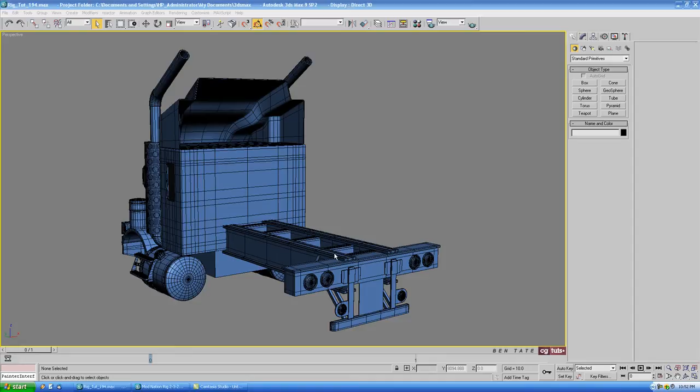Before we start working on the back of the truck here, let's actually get the mud flaps modeled in. They're going to go underneath and bolt right onto this beam here at the back. They're pretty simple, just like all the other pieces here, so we'll keep it as lightweight as possible.

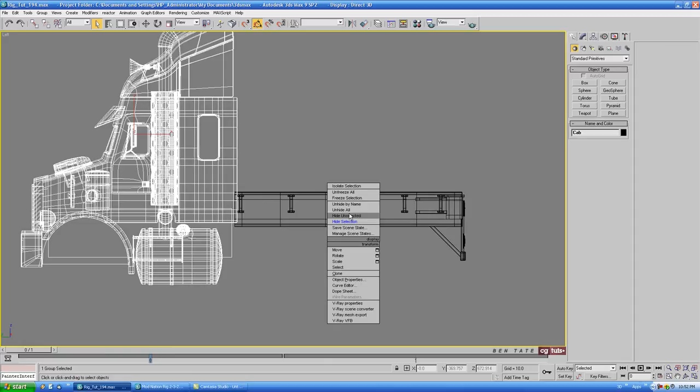Let's go into the left view and grab all the pieces here at the back. Just going to do Control I again. Before we do it, let's unhide all here so we have our blueprints, and then we'll hide the front of the truck. Let's zoom in here, and you can see it hanging down right here.

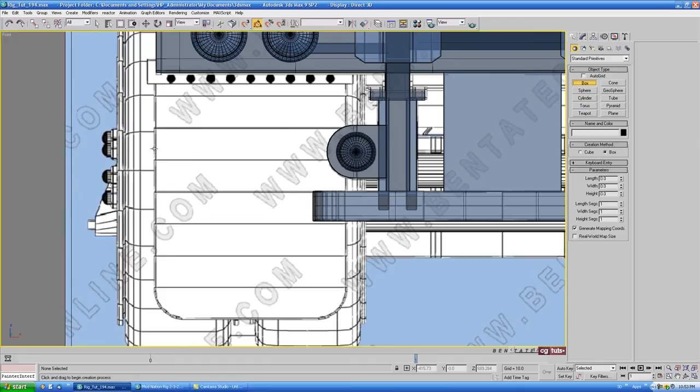Let's go back into the front view. I think we'll just start this out of a box, and then we'll put in the top bracket here as well as those bolts. Let's grab a box, and we'll draw it out from about here, and kind of fill the shape.

Give it a little bit of thickness, and we'll move it forward in the left view, and try to line up there. Let's put the blue shader on it, and we'll figure out if that's about the right thickness we need. That looks pretty good right there.

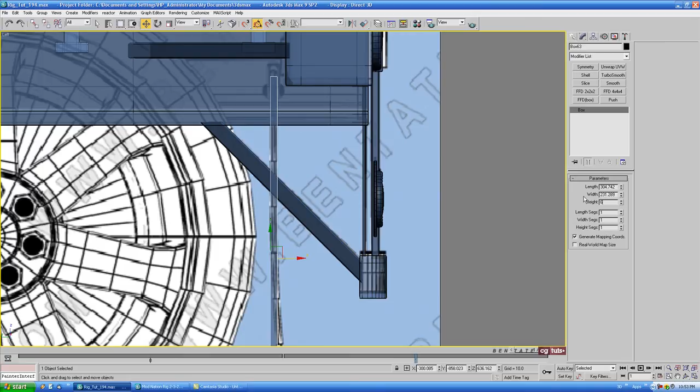Let's maybe do about 6 or so on the height. We'll convert to editable poly, and just move up the top verts here a little bit more.

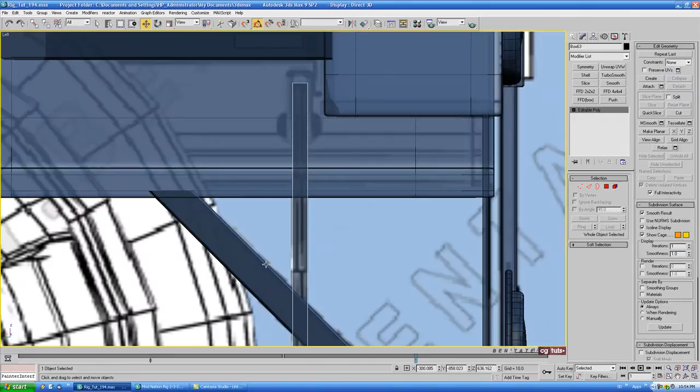Let's pull this up and try to line up with the blueprint there. It's a little hard to see, but it's right about there. We also need to bend it a little bit here at the bottom towards the back, so we're going to need to add some segments horizontally here on the surface.

So we'll go over to edge. Let's just grab the 4 side vertical edges and do a connect on that. We'll do maybe 7 or 8 segments here. Looks like 7 is what I had originally, so we'll go with that. No pinch, no slide. Hit OK to that.

We'll use the bend modifier just to bend out the bottom. Let's drop one of those on. If we do it right now, it's going to bend the entire object here, which isn't what we want. We want the bend to start about halfway.

So let's set this on the y-axis. We'll take the direction up to say 90, and bring up the amount a little bit here. You can see it bending out, and we don't want the top to bend.

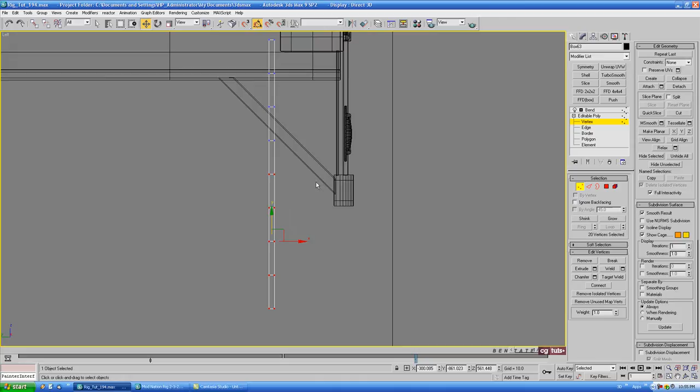So the way to get around that and only bend the bottom is to drop back down into the edit poly here, go into vertex, and grab maybe the bottom couple of rows here, verts, up to about this midpoint. Then while we're still in vertex sub-object mode, we'll go up and click on bend. You can see that only applied the bend from here down, and the top stays straight, which is what we want.

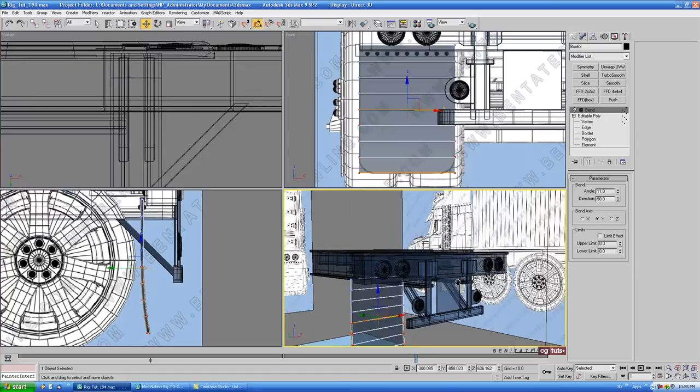Now we'll just adjust the angle down a bit until we match what's on the blueprints. Let's do about 11 or so, looks probably about right. So just like that. It still might be a little bit too thick. Let's maybe just leave it like that.

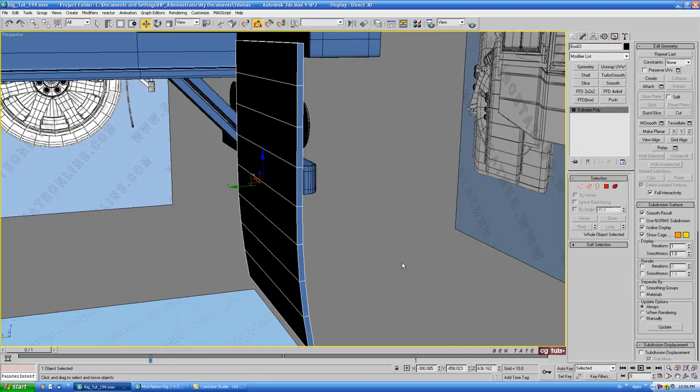Now I'm going to just collapse it to editable poly again to get rid of the bend modifier, and we'll chamfer down the edges a bit here. We'll start with the bottom 2 corners. Let's grab this corner edge here and the one on the other side.

Let's go back to the front view, and you can see they're pretty rounded over here, so we're going to give this a triple chamfer. With the 2 edges selected there, we'll open up chamfer. Let's take the amount up quite a bit.

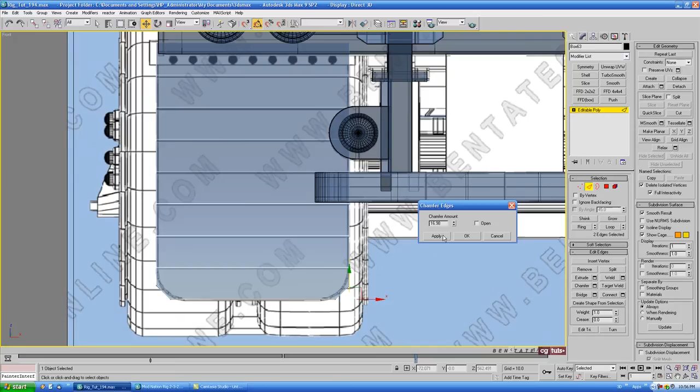Let's do about 17 or so on the first one, and we'll hit apply. We'll bring the second one down a bit. We can add some perspective so we can see where the edges are, and just try to evenly space those. Around 6.3 or so should be good, maybe just a little more, 6.5 or so. Apply one more time, bring this down a little more, and even out those edges. We'll hit OK, and now it gives us the round corners we need on the bottom.

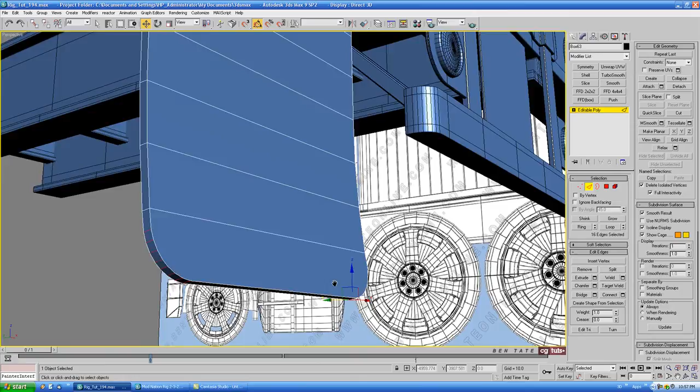Okay, so for the top, let me go into isolation mode so it's a little quicker to capture. We'll grab the 2 top corners and give them a slight chamfer. This is pretty much going to be hidden inside the bracket, so you're not really going to see this anyway. Let's do about 2 or so, and okay.

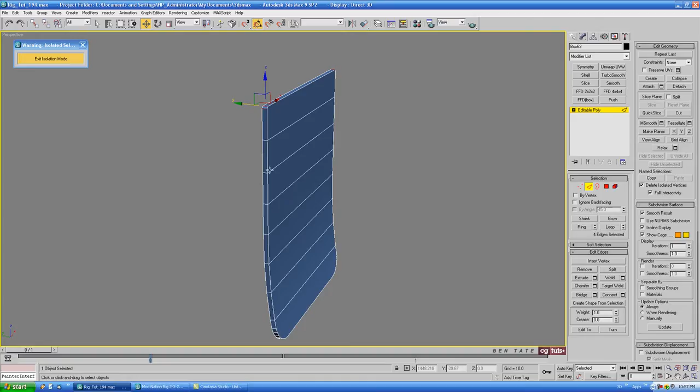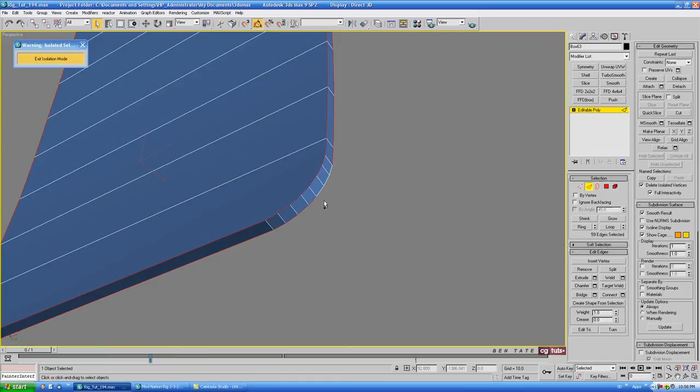We'll also chamfer down the outside edges here. Let's just grab the 4 vertical edges at the top, do a loop on that, and manually select these bottom ones. Hold down Control and grab these ones on the front and back, as well as the 2 longer bottom ones and the same ones on this side. Pretty much want to have the outline of both faces selected, the front and back faces. So like that, and we'll also get the top couple up here.

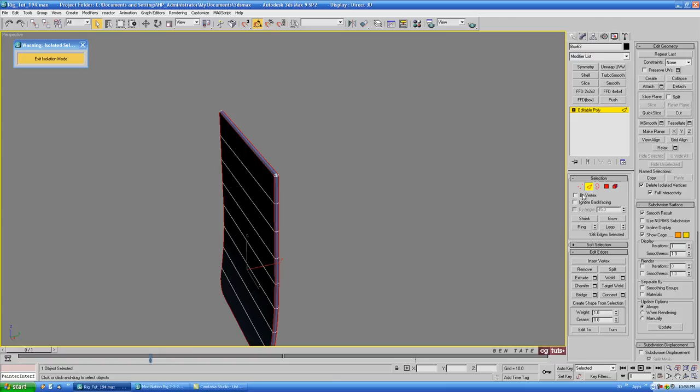We'll just chamfer these down a little bit, take that down a little more. Let's do about 1.5 or so, and okay. That's virtually it for the mud flap, really simple geometry. Now that we have that done, we'll just exit isolation mode.

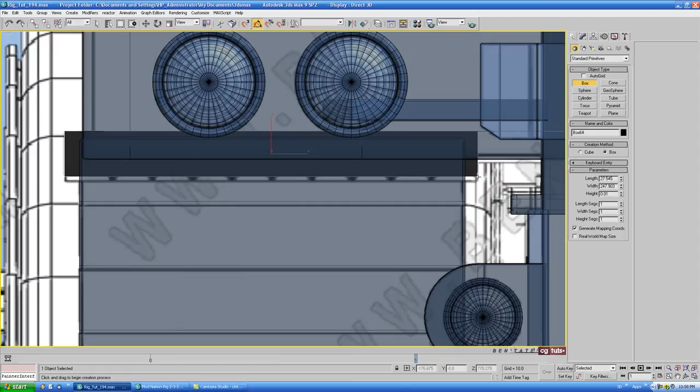We'll start working on the brackets here, back in the front view again. This is the bracket. We'll start this out of another box. I'm going to start in this upper left corner and take it all the way to the other side and try to line it up. Give it a little bit of thickness, and we'll move it to the back here in the left view.

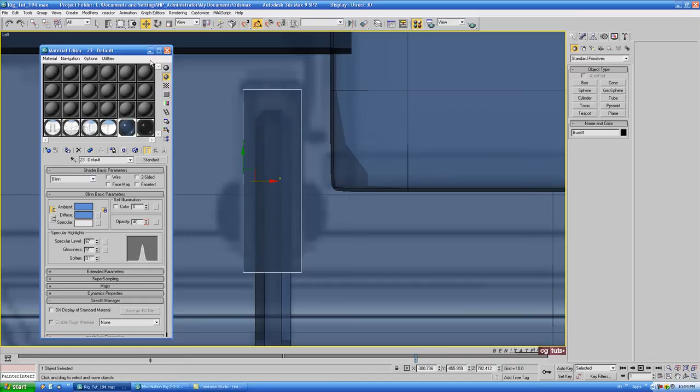We want to have the mud flap sandwiched in between kind of 2 pieces here, so we'll delete out some polygons in a second. Just see if that's about the right thickness we need. I'm going to put the blue shader on it, and that looks pretty close right there.

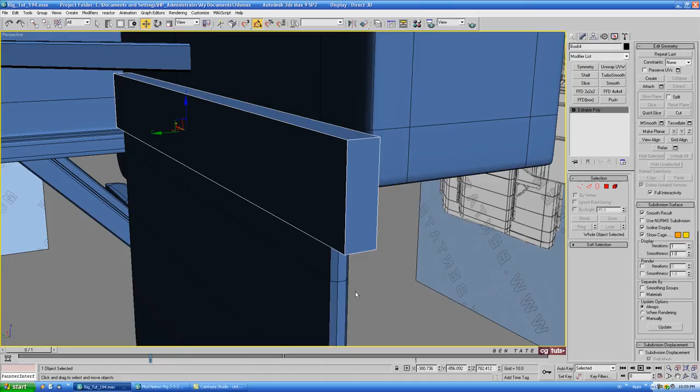Let's do maybe 10 or so on the height. We'll just kind of center that to the mud flap. Now we can convert this to editable poly. I'm going to select the mud flap as well as this piece, and hide everything else by going into isolation mode. We'll delete out some polygons here on the top piece. Back into polygon, grab the 2 end polys as well as the bottom one and delete those. Okay, just like that.

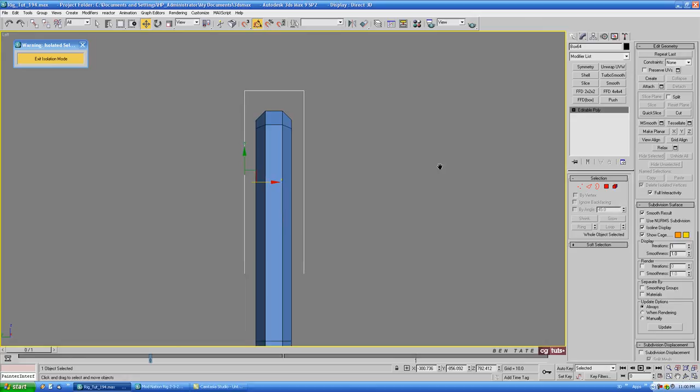We'll jump into the left view here, and to get some thickness on this piece we'll use another shell modifier. Drop one of those on, right click the outer amount and take up the inner amount. We also want to make sure we check on straighten corners so the edges are straight. We'll take that up until it touches up with the mud flap, and it looks like about 2 or so should be good. That'll give us a piece there that we can sandwich in between.

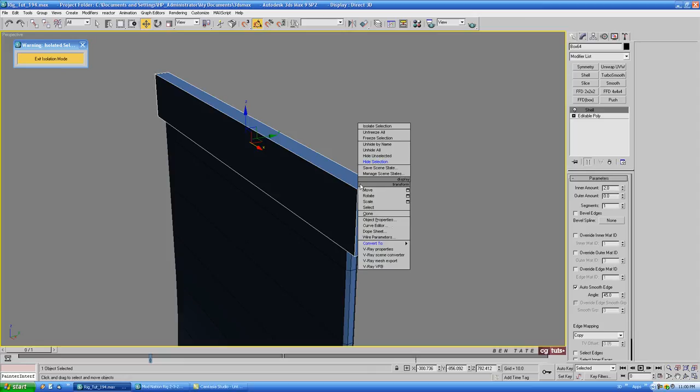That's pretty much it for modeling. We'll collapse it down to editable poly and knock off a couple of these edges. Let's grab these 2 top ones, do a loop on those, and a chamfer. Let's roll it over a little more here, do about 1.25. If you really want to smooth it out you can give it another chamfer there, but I don't think it's necessary.

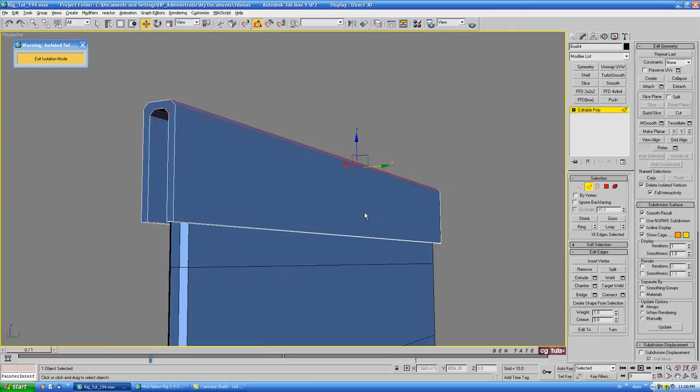We'll knock out the bottom 4 corners as well, or 4 edges. Grab those, chamfer them down, and tighten this one up a little more. Let's do about 0.5 or so, and okay.

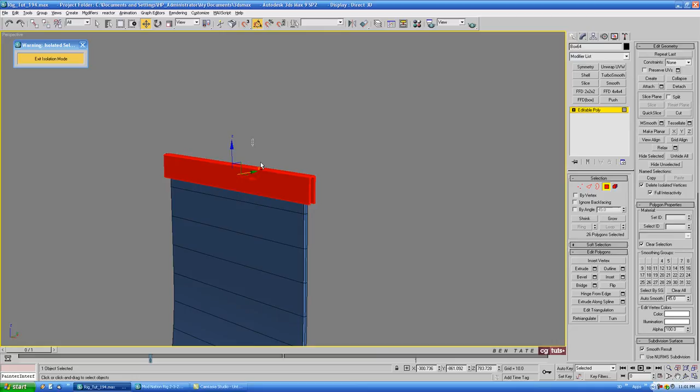For the edges on each end, we'll go into polygon and grab the 5 polygons on each end, just do it this way, and deselect those middle ones. Then we'll control click edge, go into left view, hold down Alt and deselect these cross edges here. We just want the ends to be selected, and we'll give that a slight chamfer as well. That looks pretty good right there, around 0.4 or so.

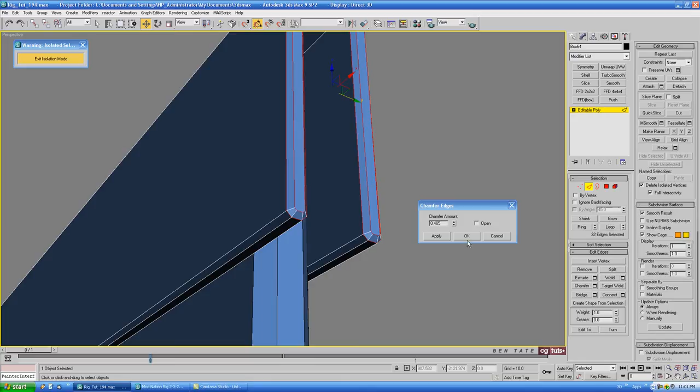So that'll be the top bracket for the mud flap. Let's get out of isolation mode again, and we need to add some bolts onto here obviously, so let's maybe unhide all.

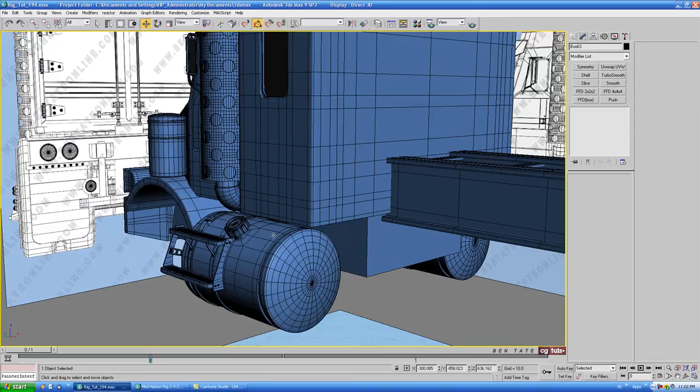And we'll just steal one off the front of the truck. Okay, so I'm going to grab this and let's ungroup it. Okay, and we'll steal one off the gas tank maybe, so let's ungroup that as well.

Okay, we'll zoom in here, let's grab one of these ones here. Alright, so we'll just shift drag that back on the Y as a copy. And we'll just move it all the way to the back.

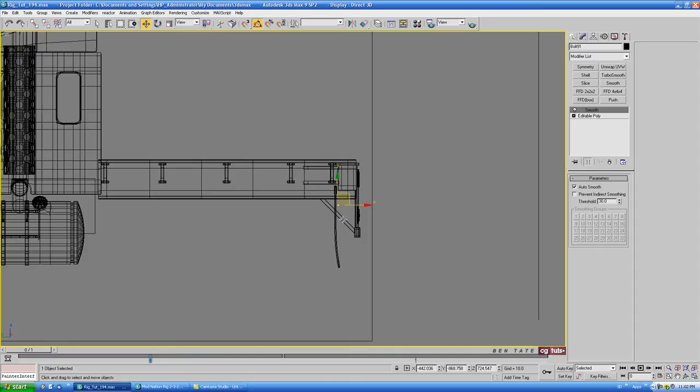Okay, now we can just hide the rest of this stuff here. Let's go grab all the pieces of the cab and hide those. Okay, and we'll grab our bolt clone here and just move it up. And you can see it's pretty small, so we're going to need to scale it up quite a bit here.

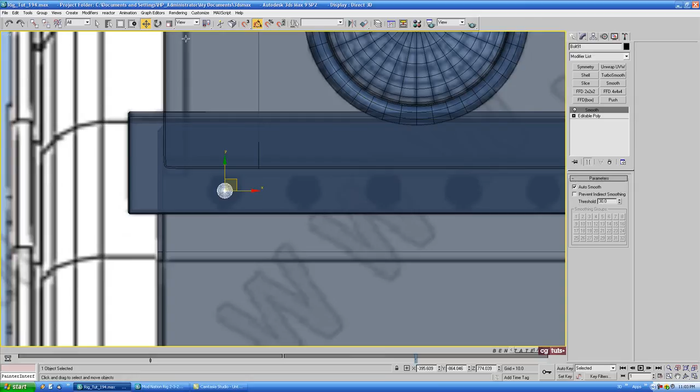Just going to move it in, and you can kind of see where the bolts are there on the blueprint. Alright, so we'll just line it up with the first one, and we'll scale that up quite a bit. We want these to look a little bit more oversized. Okay, and we'll also make sure that the pivot point is centered and that it's touching the surface.

Alright, so just push it in a little bit. Like that.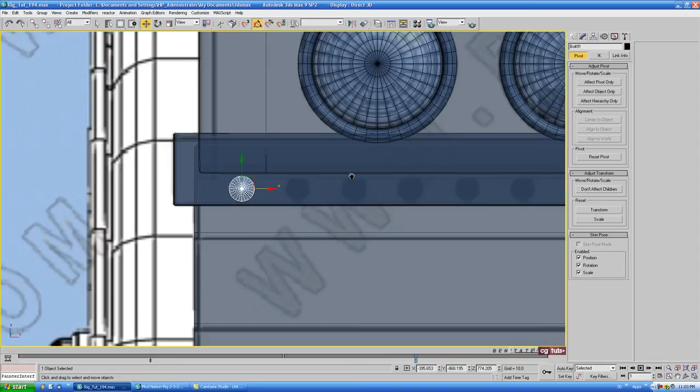Okay, and then we'll go back to the front view here and we'll just clone this along. Alright, so we're going to hold down shift and drag it over on the X to the second bolt there on the blueprint. And for this one we'll choose copy and we'll just take this up a bit. Let's do about 8 and OK. And I'll create the 8 copies.

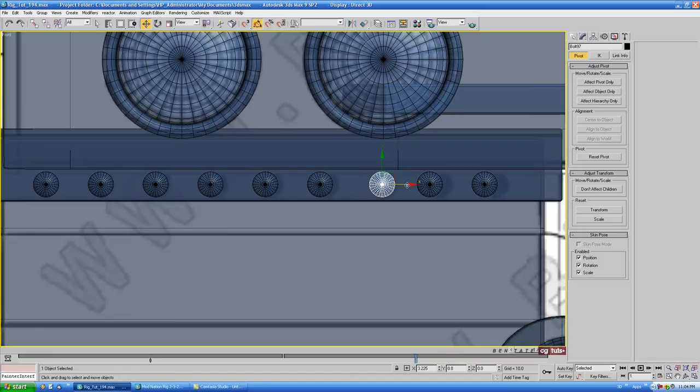And you can see they're not evenly spaced properly here. It looks like it has a little bit of an offset. See how that looks in the perspective view. Okay, and it doesn't look that bad. If you want to, you can just select these and just line them up a little bit better. Or you can even use the spacing tool to do this, but I think that's pretty even, so we'll just leave it like that for the sake of speed.

Okay, let's grab them in the left view here, all the bolts. I'm just going to move them up slightly, so a little bit more evenly spaced between the bottom of this piece and the bottom of the bracket here. Right, a little bit more down maybe. Okay, that looks pretty close.

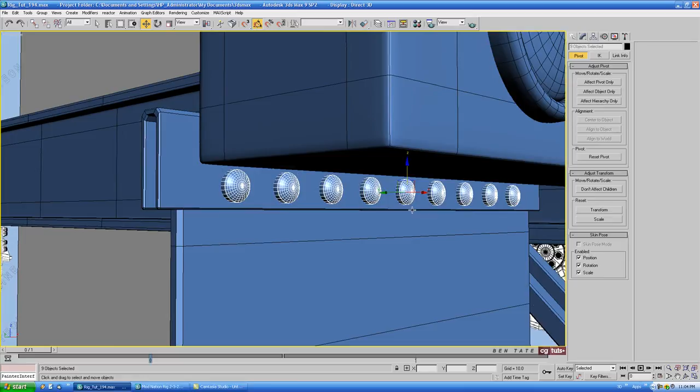Alright, so with these pieces selected, I'm just going to do a mirror as a copy on the X. And we'll just drag these ones over and put them on the outside. Or the inside, sorry. Okay, just like that. Really, really simple. And right now this piece is just floating next to the back of the truck here, so

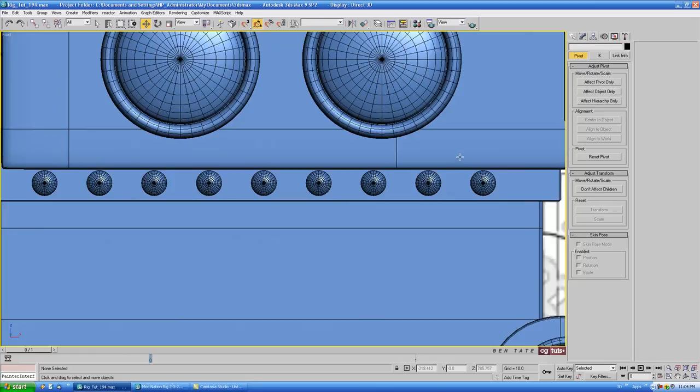We're going to need to put something in here so it looks like it's kind of bolted on. We'll just use a simple box to do this. Okay, so let's go back to the front view. Let's switch this to the back view now.

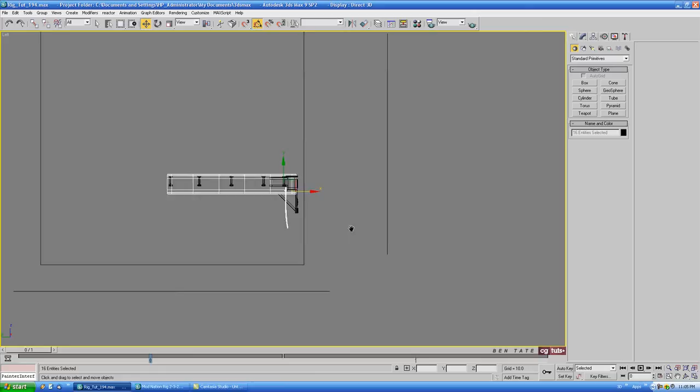Okay, and let's maybe grab a box here. And we won't be able to see this piece on the blueprints, so I'm actually going to hide those right now. We'll just select these few pieces here. Let's actually just select the entire back of the truck. Okay, we'll hide unselected again to get rid of the blueprints.

It's a little bit faster. And back in the back here, I'm just going to grab another box and we'll just kind of make some kind of simple shape here. All right, so let's start maybe over here. And we'll come over something like that, just a little bit short of that bar there. Give it a little bit of thickness.

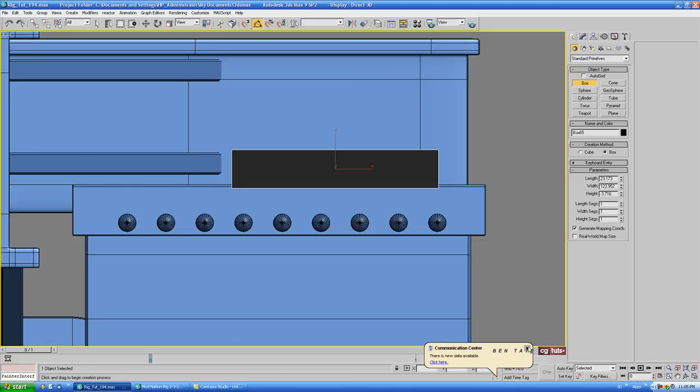And we'll just push this back in the left view and just set it right in here. Okay, so right against that back beam. Okay, let's convert to a poly now. And we'll just adjust the thickness a little bit by moving these front verts out. Okay, we can also make it a little bit longer, so I'm just going to pull the bottom verts down. Okay, so it's kind of filling that gap in between there.

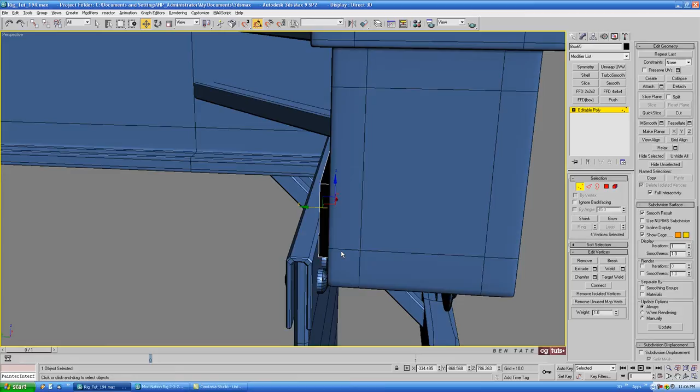Okay, and I think that should be fine for size. So let's chuck the blue material on there. And let's just maybe knock these edges off a little bit. Okay, so back to edge, grab one of those corner edges, let's do a ring on it, and a chamfer.

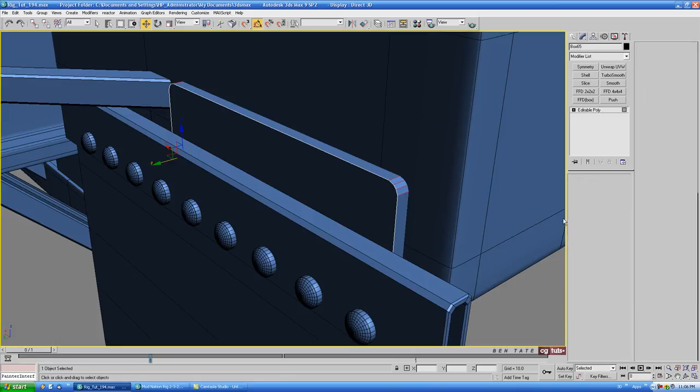And let's maybe do a double on this just to get a little bit more of a different look. Okay, I'm going to take that up to about 2.5, hit apply, and take the second one down, just to roll it out a little bit more. And about 1 should be good for the second one. And then we'll grab that front polygon, and let's grab the back one as well.

And we'll control click edge here and just chamfer these edges down. Okay, I'm going to tighten that up quite a bit. And that should be fine for the bracket that we need. And you can put a lot more detail into these pieces. I'm just doing it as simple as possible for the sake of speed.

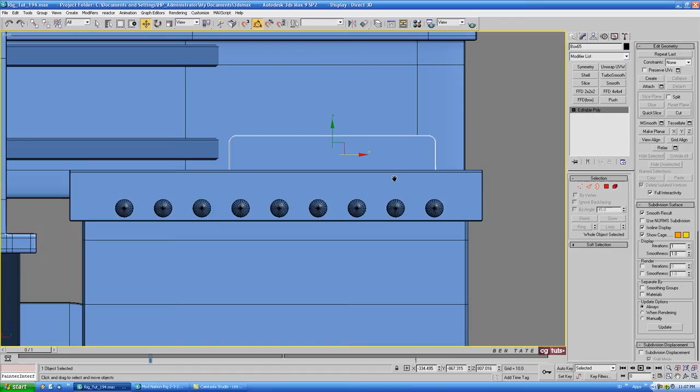Okay, let's maybe also put one over here on the inside of the bar, over in this section. So let's just shift drag this on the X. I'm just going to bring it over like that as a copy. And we'll just kind of evenly space it here on each side of this bar.

Okay, something like that should be good. And we'll just shorten it up here by vertex in the back view. Okay, so back into vertex, grab all those left verts. And we'll just pull it over and maybe put something in somewhere like that.

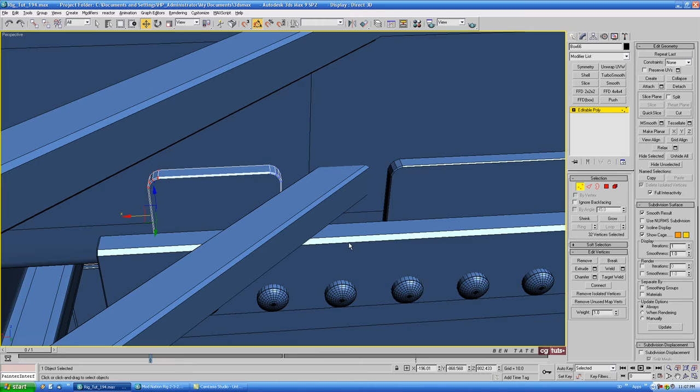Okay, and let's also throw a couple bolts in there. So let's just maybe grab one of these ones from the lower piece here, and we'll just shift drag that up as a copy. And let's just position it maybe right around here.

We'll just shift drag a copy over to the other end. And let's also maybe do one in the middle. And I'm just going to eyeball the distance between each piece here. Okay, and we'll also maybe put a couple of bolts over on that smaller piece.

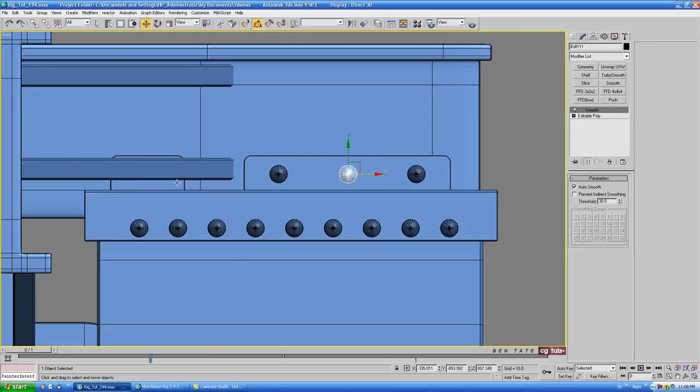So we'll shift drag another one. And let's do 2. Okay, and they're still away from the surface here, as you can see. So let's grab all 5 of these. And we'll just push them back in the left view here until they're touching up with the surface.

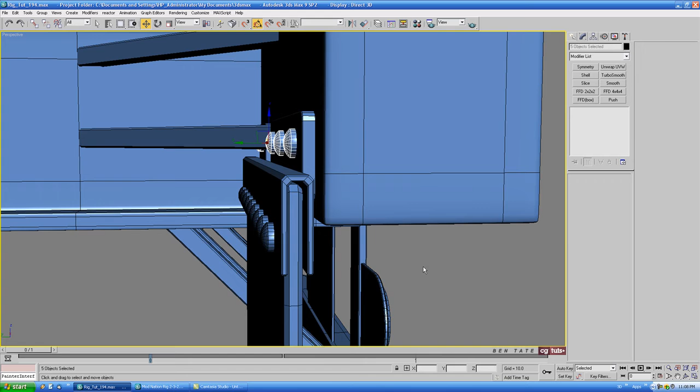Okay, and I think that'll take care of the mud flap. Like I said, it's really, really simple. You could definitely do a lot more detail in here. Okay, so now we'll just flip a copy over to the other side there, and we should be done with pretty much the framing of the truck.

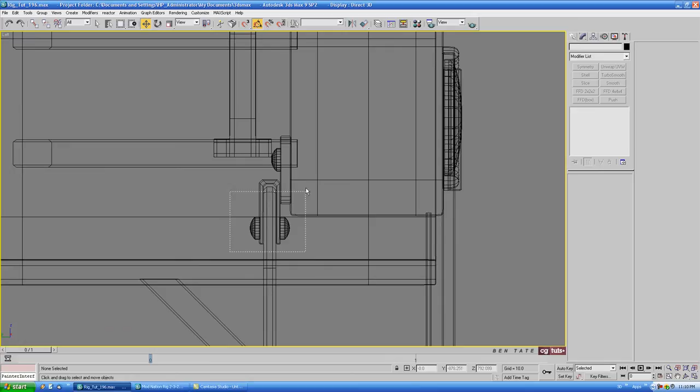Alright, so let's go into the left view, and we'll just select all the pieces of the mud flap, as well as that upper bracket and bolts that we made. Okay, we'll deselect these other pieces here that we don't need. Okay, so we just have all these pieces selected here.

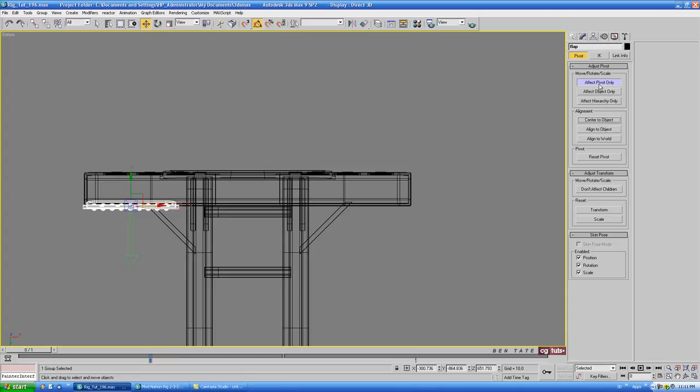And let's maybe do a group on this. We'll just call it flap. Okay. And let's go into the top view. And we'll make sure the pivot point is centered here by going into the hierarchy panel again, Affect Pivot Only, Center to Object. And with the button still depressed, we'll just zero out the x-axis again, so it's in the center,

turn off the button, and just do a mirror as a copy on the X. Okay, we'll just check to make sure that's lined up correctly. Okay, that looks right, so we'll go with that. And I think that'll pretty much complete the entire bottom portion here, unless I'm forgetting something, but I don't think

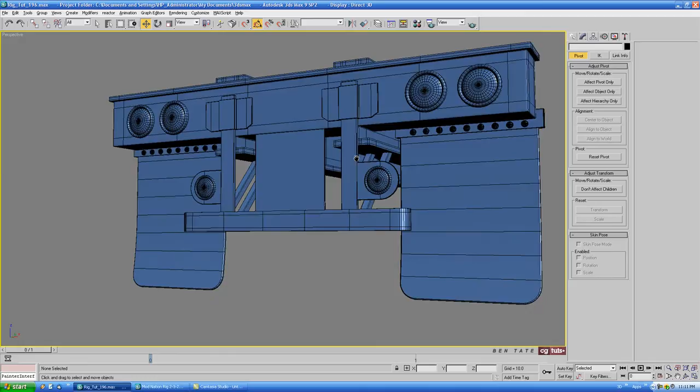we are. So now we can finally start working on the actual bed up at the top, as well as the doors and all the pieces that make those up. Alright, so let's just select all these pieces here. We'll unhide all again.

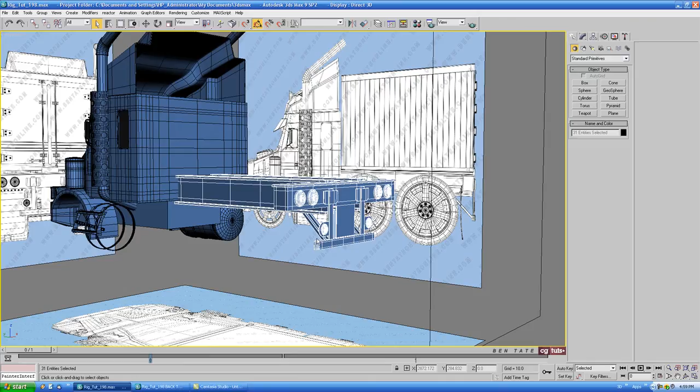And as you can see, it's getting pretty laggy here, so let's just invert the selection with Control I and hide the front of the truck. And we'll start working on the back now. And this is also going to be quite simple. Alright, so I think we'll start up on the top piece, and then we'll do the sides after we get those in place.

Alright, so for this, let's maybe use a chamfer box. So I'm just going to go over to the create panel, pull this down to extended primitives, and we'll grab a chamfer box here. And we'll just drag this out over top. Okay, just like that. Give it some width, and then we'll just roll it over a little bit here.

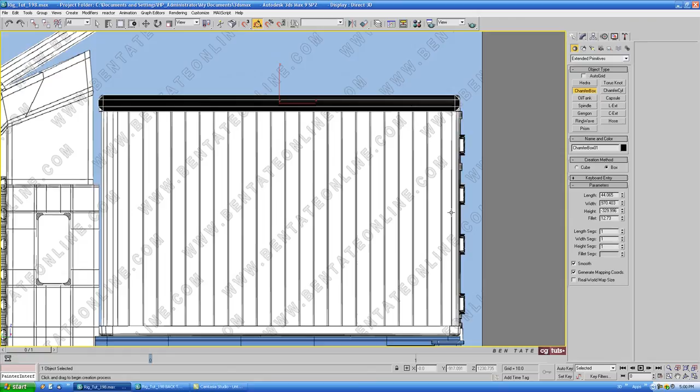Maybe something like that. Okay, we'll see how that looks here. Let's put the blue shader on it.

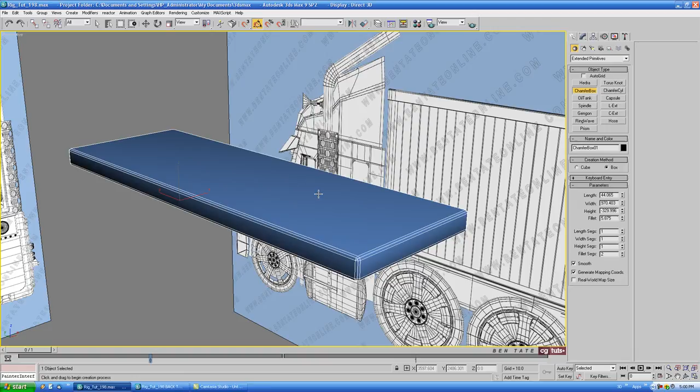Let's add an extra fillet segment here, just so it's a little bit more smooth on the corners. I think that'll probably work fine. So let's convert it to editable poly, and we'll just adjust the width here.

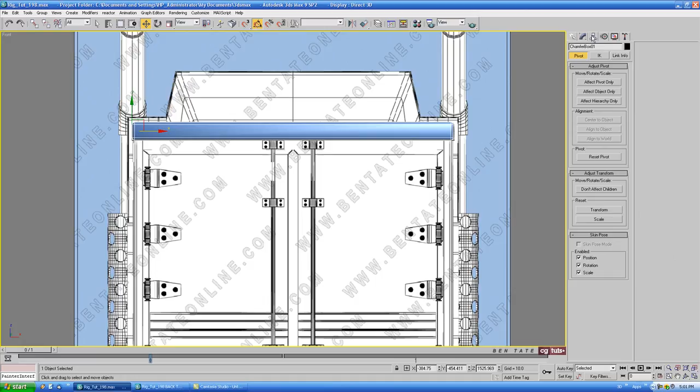Let's switch this back to the front view, and we'll just drag it over here to the left side and line it up. We'll go into vertex, grab all the right side verts and just stretch it over to the other side. Like that. We'll also center the pivot point here and just zero it out on the x-axis.

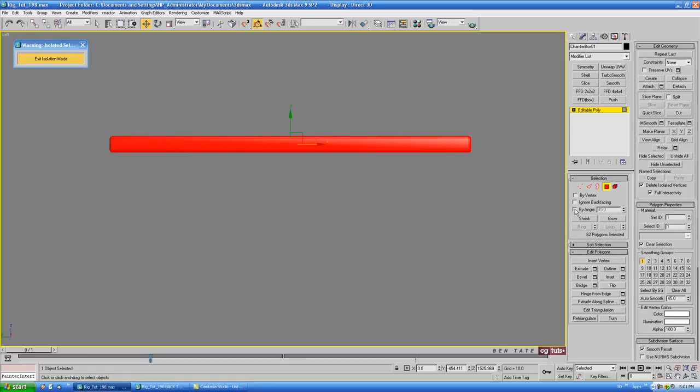I'm just going to go into isolation mode with Alt Q. The first thing we'll do here is get rid of these bottom polygons, which we don't really need. So let's go into polygon, grab all the polys here, make sure ignore backfacing is turned off, and then hold down Alt and deselect the top and side polygons. So we have the bottom selected up to this edge here. We can just delete those out now.

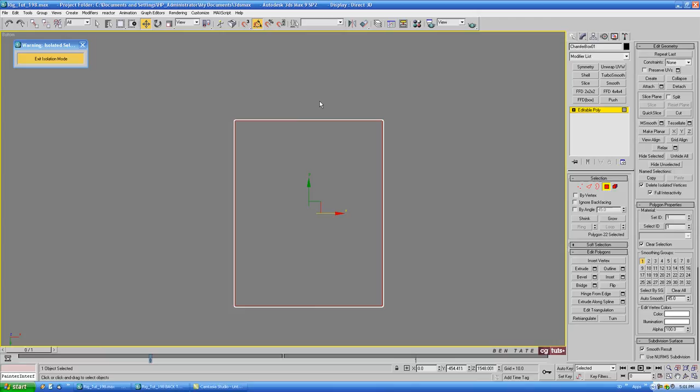For the top here, let's do an inset on this top polygon. Let's select that one, and let me go into the top view, turn off shading with F2, and exit isolation mode for a second so we can see the blueprints. We also want to switch this to the top view, and I just need to see how far we have an inset here. With that top polygon selected, we'll do an inset, and take this up until it matches what's on the blueprints. We'll do about 30. That should be fine, hit OK.

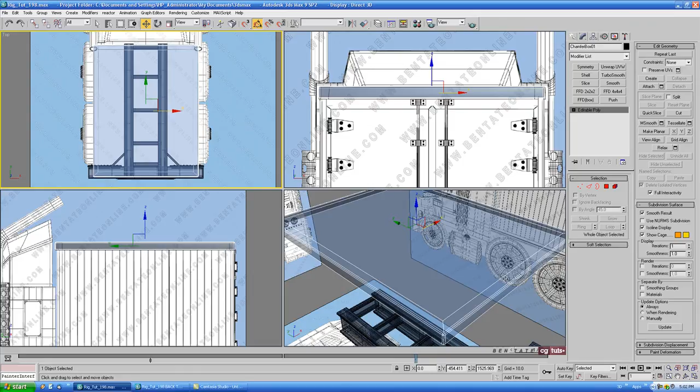Hit Alt Q again here, and we'll punch the top polygon in a little bit here, just to add a little more detail. So let's do an extrusion, bring that down to a negative amount. We don't need it to be super deep, let's do about -6 or so, and OK.

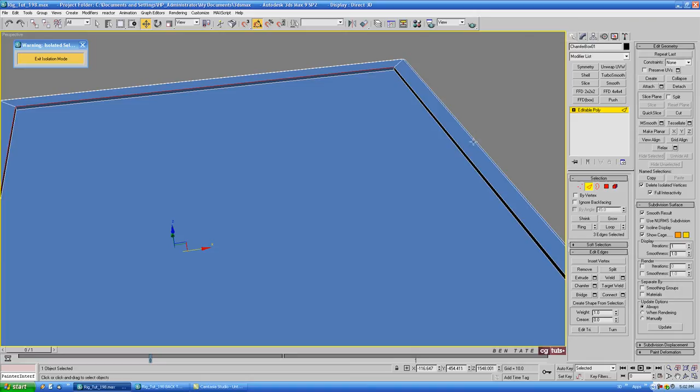Let's also chamfer down these top edges. So let's go back to edge and grab the 4 top edges here, and we'll give that a small chamfer. Let's do around 1 or so, that looks fine. I'm not going to bother to chamfer the inside corners here, I think we can just leave those the way they are so we don't have problems when we chamfer this edge.

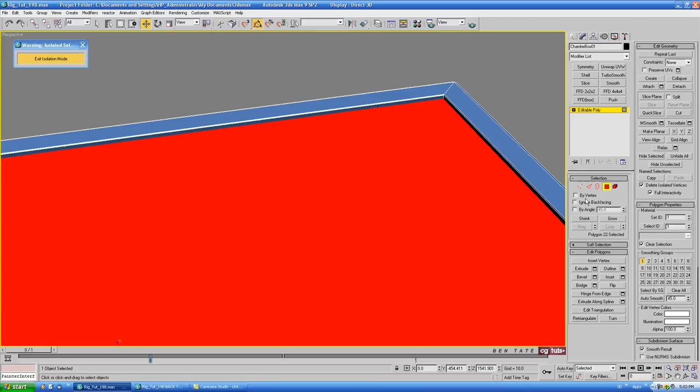But let's also chamfer the lower edges here. So let's grab this polygon again and then control click edge, so we have the 4 edges running around there, select it, and give that a chamfer as well. We can do that maybe around 0.8 or so, and that should be fine.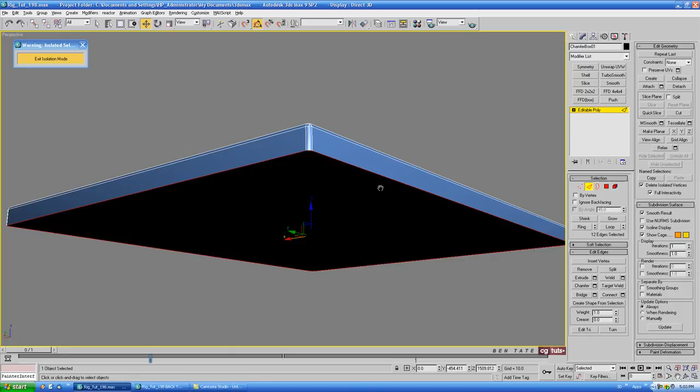So we'll come underneath and cap the bottom of this, so let's go back to border, grab that open border at the bottom and hit cap. With that still selected, I'm going to control click edge, so we have those edges selected around the bottom, and we'll chamfer this down as well. Let's do around 1.3 or so on that.

Now that pretty much takes care of the top of the truck. It's really, really simple, and there's no reason to overcomplicate things, so we'll leave it like that. Let's exit isolation mode, and go back into the left view here.

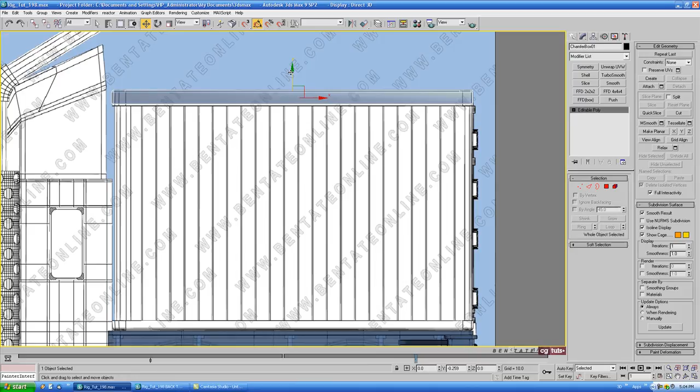Let's adjust the width here just a little bit. I'm just going to move that down slightly, and we'll pull the bottom verts down a little bit more so it matches up with the blueprint better. So grab all those bottom verts and just move it down. We'll center the pivot point on this piece.

Then we'll do a mirror as a copy on the Y, and we'll use this for the bottom. So let's bring that right down, and set it right on top of the framing.

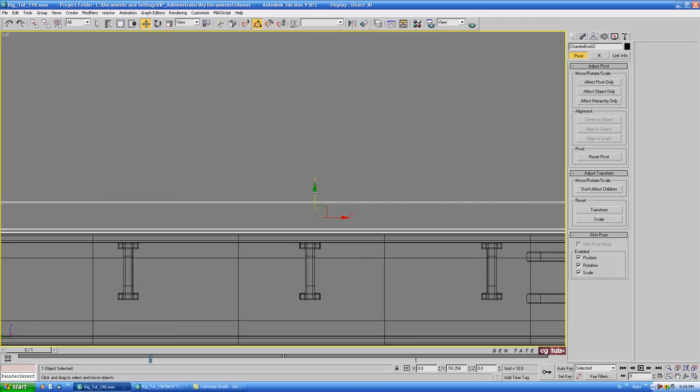Just like that. And for this one, I think we can thin it up a little bit more. So back into vertex here, grab the top verts this time, and just pull it down until it matches up with the blueprint.

Alright, so that'll pretty much be the shape of the back of the truck here, and we'll just start working on the actual corrugated sides, which will be pretty simple for us to model.